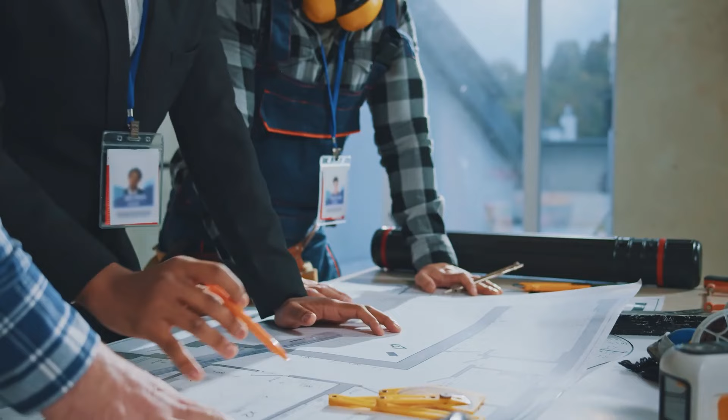American Copper Buildings, New York, USA. New York has more skyscrapers than Beijing, Seoul, and Toronto combined. Only Shenzhen and Hong Kong surpass it, leaving Manhattan packed so tightly with towers that new projects often demand highly inventive solutions. Over the years, we've seen pencil-thin supertalls, towers stacked on top of existing buildings, and even skyscrapers balanced on stilts. But nothing quite prepared the city for what rose on the banks of the East River.

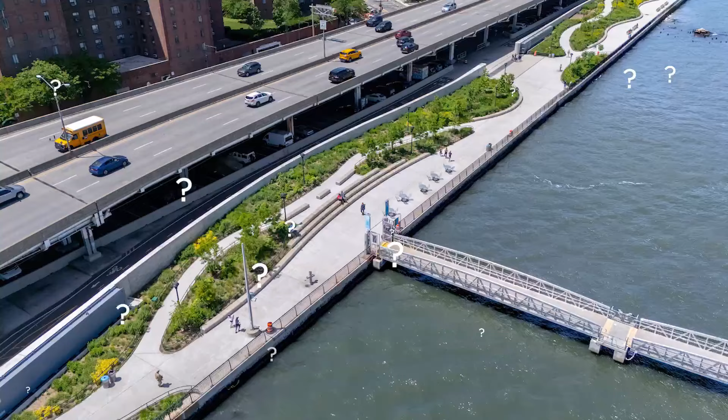The site itself was a puzzle. A protected park sat on one side, a planned schoolyard on the other, and just two narrow footprints remained available for development. Building two towers separately would waste potential, but combining them seemed impossible. The architects came up with a daring solution: lean the towers toward one another and connect them in the middle with a bridge. This idea became the American Copper Building, two slanted skyscrapers joined by a three-story sky bridge that instantly became one of the most distinctive silhouettes in the city.

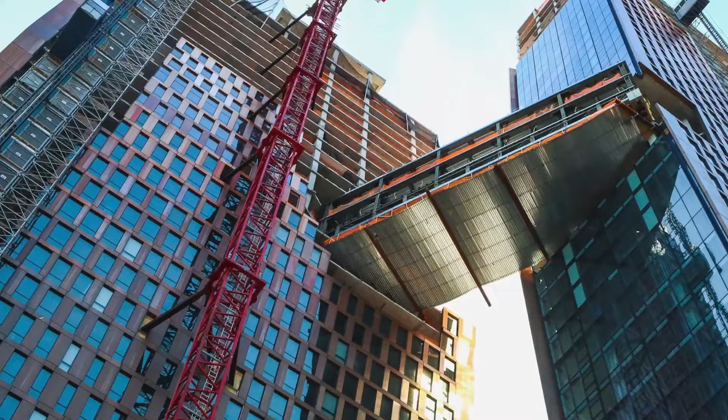The bridge itself was a challenge unlike anything New York had ever seen. Instead of fixing it rigidly, engineers had to let it move. It was anchored firmly to one tower, but allowed to glide on massive Teflon plates on the other. That way, when the wind makes the skyscrapers sway, each tower can shift independently without ripping the bridge apart.

Inside, the bridge was more than just a connector. It became a centerpiece, housing lounges, a gym, and even a swimming pool 300 feet in the air where residents could literally swim from one building to the other.

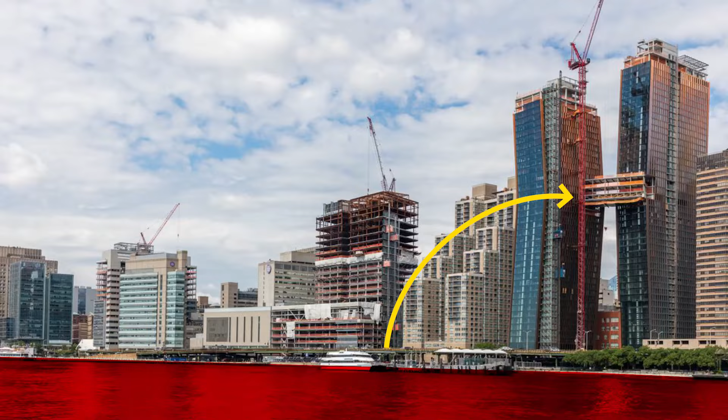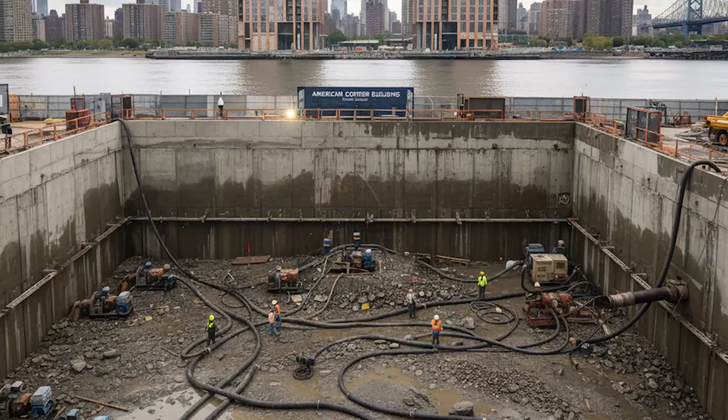But the problems didn't stop there. The construction site sat barely a meter above the East River, and the water table threatened to flood it before anything could rise. To solve this, crews dug the foundations inside a watertight concrete bathtub. Pumps worked around the clock for over a year, removing nearly 1.5 million gallons of water every single day just to keep the ground dry enough to build. Only after that could steel and concrete climb skyward.

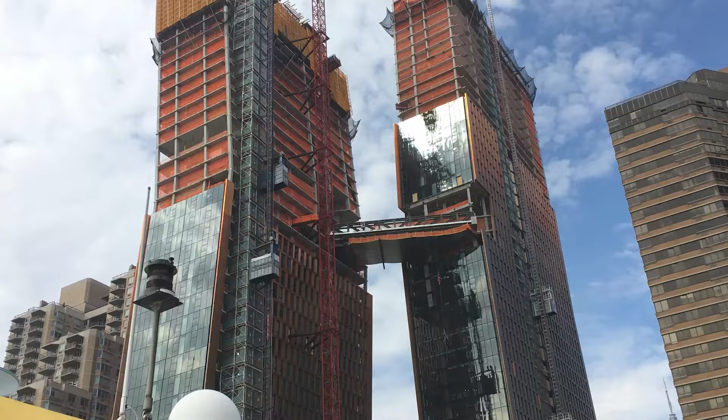Then came the structural drama. Because the towers were designed to lean inward, their appearance fooled people into thinking they were collapsing. Passers-by reported them as unsafe, and even the fire department demanded to see the blueprints to make sure the project wasn't a disaster in the making. To calm fears, engineers had to explain how the tilt was intentional and carefully balanced.

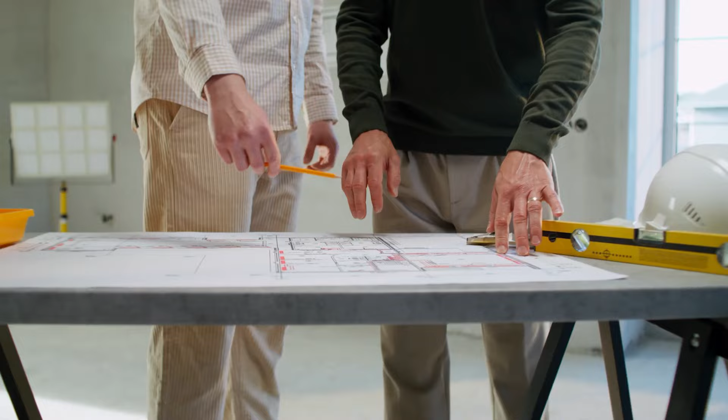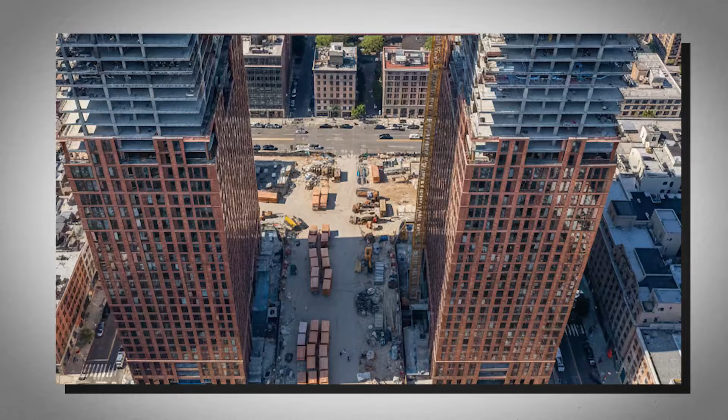Finally, there was the choice of skin. Covering the entire facade with over 4 million pounds of copper was a gamble. No other skyscraper in the city had ever been fully clad in the metal. At first, the orange glow of raw copper made the towers stand out like burning embers on the skyline. Over time, it will slowly darken, then eventually turn into a green patina like the Statue of Liberty, giving the building a living, evolving character that no other high-rise in Manhattan can claim.

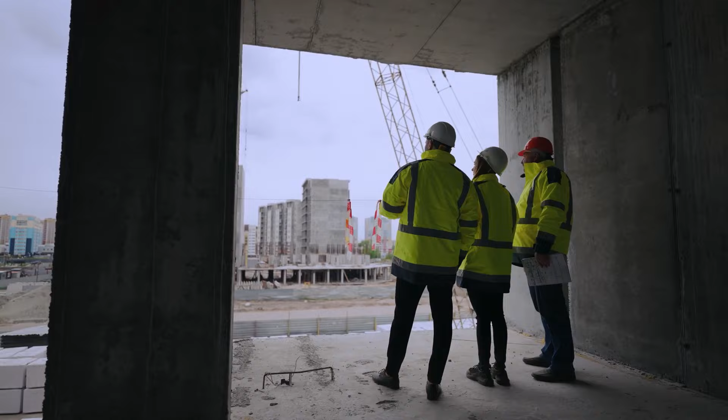Through all of these hurdles, the tight site, the flooding risk, the moving sky bridge, the alarming tilt, and the bold copper facade, the American Copper Building emerged as both a piece of engineering genius and architectural art. It revived the concept of the sky bridge in New York for the first time in nearly 80 years and proved that even in one of the most crowded, expensive, and complicated cities on Earth, daring ideas can still rise above the skyline. Marina Bay Sands, Singapore's sky-high surfboard.

Singapore's Marina Bay Sands isn't just a hotel, it's one of the most ambitious architectural experiments ever built. Three massive towers rise from the reclaimed land of Marina Bay, and across their tops sits something that looks almost impossible. A giant surfboard-shaped sky park stretching longer than the Eiffel Tower is tall.

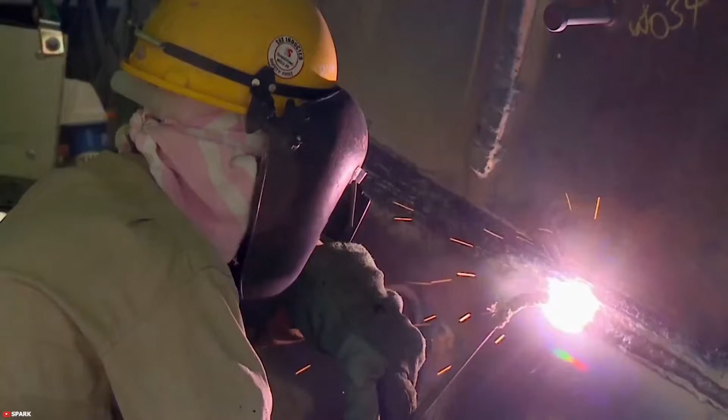Perched 650 feet in the air, it holds restaurants, gardens, observation decks, and the world's highest infinity pool, a pool so iconic that it seems to spill directly into the city skyline. But bringing this vision to life was a constant battle with physics.

The land itself was a challenge, built on reclaimed soil that was soft, unstable, and prone to settling. To anchor the skyscrapers, engineers had to drive more than 5,000 deep foundation piles into the ground, creating an underground forest of supports just to keep the towers steady.

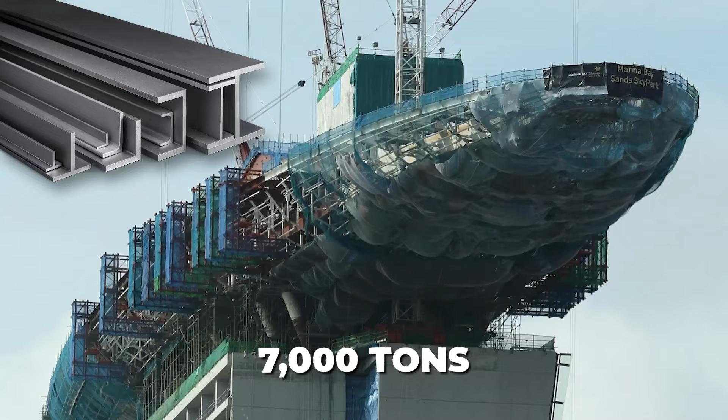Then came the biggest question: how do you balance a sky park the size of an aircraft carrier across 3 towers? The answer required both audacity and precision. The sky park was constructed in giant steel segments, some weighing over 7,000 tons, and then hoisted into place by one of the heaviest lifts in construction history.

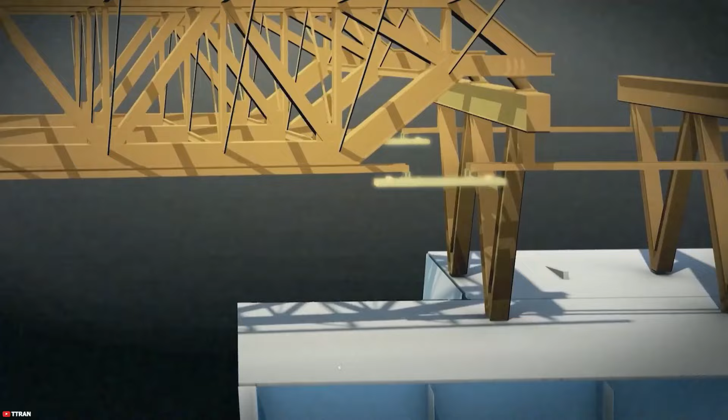One end cantilevers 66 meters beyond the edge of the tower with no support underneath, the longest public cantilever on Earth. To make it work, engineers had to install a system of expansion joints and flexible bearings so the park could shift with wind, temperature changes, and even small movements of the towers themselves.

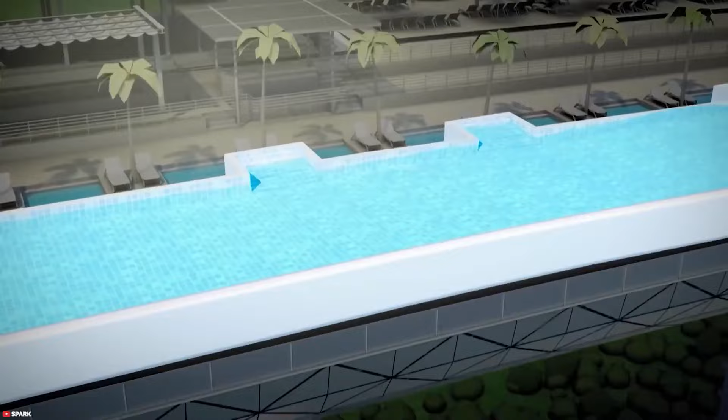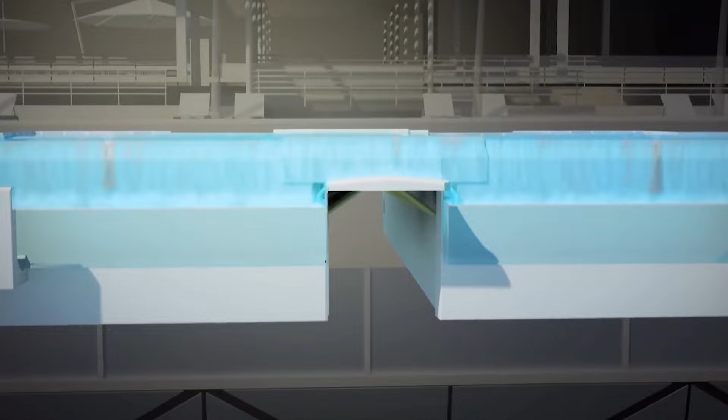The pool itself created another nightmare. At 150 meters long, it stretches across all 3 towers. But because the towers naturally sway in the wind, the water at the edges would slosh violently if left unchecked. To prevent disaster, the pool was built in 3 separate sections, with hidden expansion joints and surge tanks that absorb water movement. That way, guests can float calmly at the edge of infinity while the skyscrapers subtly shift beneath them.

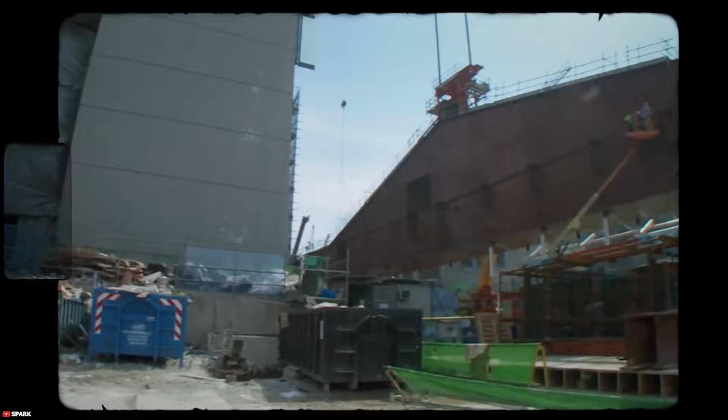Even during construction, dangers loomed. Hoisting the sky park's steel sections required flawless coordination. One misalignment and the entire structure could twist or crack. Workers labored hundreds of feet in the air, bolting and welding steel while cranes delicately nudged the massive pieces into place. Delays, budget overruns, and the sheer complexity of the project made many wonder if it would ever succeed.

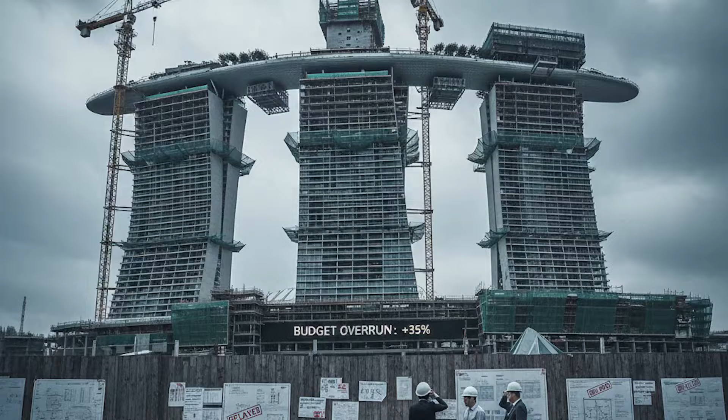Yet against all odds, Marina Bay Sands opened in 2010 as one of the most striking man-made landmarks in Asia. Its 3 leaning towers and gravity-defying surfboard redefined what a skyscraper could be, transforming Singapore's skyline into something instantly recognizable around the world. What was once dismissed as impossible has become a symbol of engineering genius, where tourists now sip cocktails and swim above the clouds.

Turning Torso, Sweden's twisting revolution. On the waterfront of Malmö, Sweden, rises a skyscraper that seems to defy gravity and geometry alike. The Turning Torso was the world's first twisting skyscraper, rotating a full 90 degrees from its base to the crown. Completed in 2005, it immediately became a symbol of modern architecture, but its daring form posed engineering challenges unlike any before.

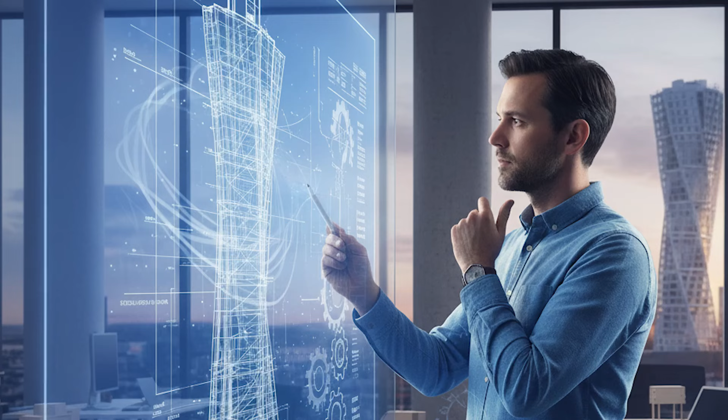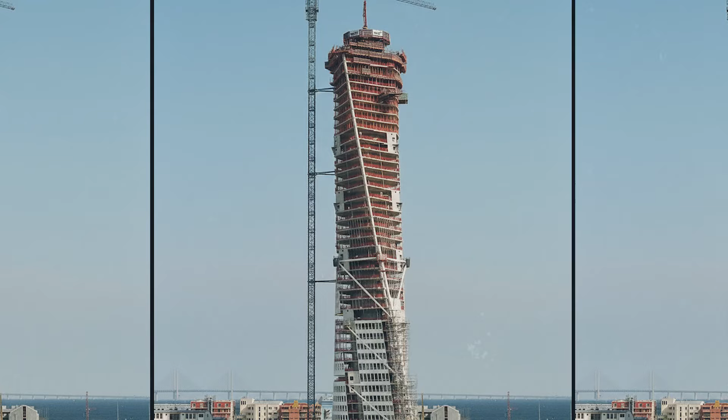Designed by Spanish architect Santiago Calatrava and inspired by a human body in motion, the tower had to translate an organic sculpture into a functional, livable building. Divided into 9 stacked segments, each containing 5 floors, the Turning Torso twists gradually as it rises, creating a dramatic corkscrew effect. But twisting a tower introduces uneven loads and torque that could easily destabilize a conventional structure.

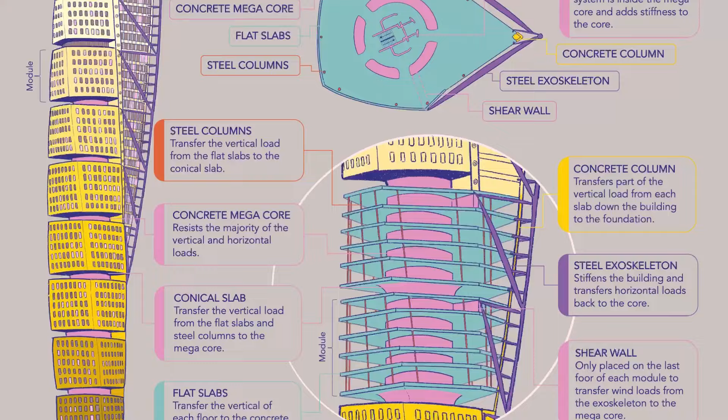To solve this, engineers anchored the building around a massive reinforced concrete core, while an external steel framework acts like a spine, distributing the twisting forces safely to the ground. Every floor plate and facade panel had to be custom-shaped and positioned with millimeter precision. Prefabricated concrete slabs were cast off-site and rotated into place one by one to maintain the spiral alignment.

At 190 meters tall, the Turning Torso became Scandinavia's tallest building and the first skyscraper to prove that twisting architecture could work. Its bold design inspired a generation of spiraling towers worldwide, from Dubai's Cayan Tower to Shanghai Tower. Here, on Sweden's southern coast, a radical idea became reality, a building that doesn't just reach for the sky, but twists toward it.

Bosco Verticale, Milan's vertical forest. In the heart of Milan, 2 residential towers rise above the city, but instead of glass and steel dominating their facades, they're covered in something completely unexpected: trees. Known as the Bosco Verticale, or vertical forest, these twin towers host over 900 trees, 5,000 shrubs, and 20,000 smaller plants, transforming the skyline into a living ecosystem.

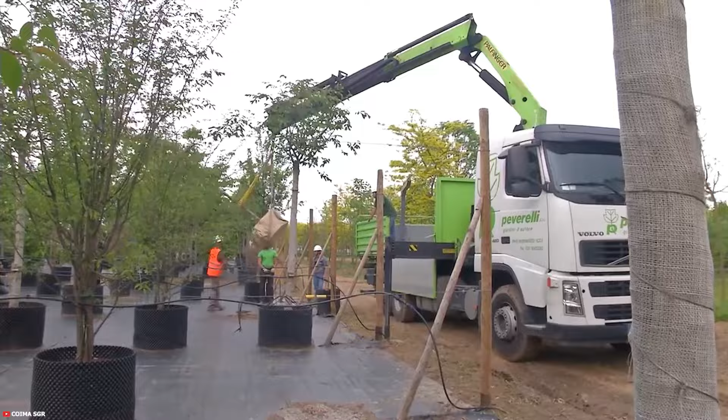The project was conceived as a radical solution to one of modern cities' biggest challenges: pollution. Each tower functions like a giant air filter. The vegetation absorbs carbon dioxide, produces oxygen, and helps reduce fine dust particles, improving air quality and cooling the surrounding environment. But turning skyscrapers into forests posed enormous engineering hurdles. How do you place fully grown trees hundreds of feet in the air without them toppling in strong winds?

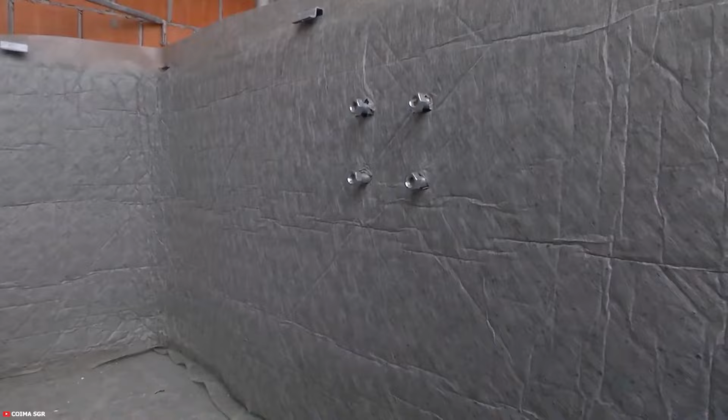Engineers designed massive reinforced balconies to support soil, root systems, and irrigation while carrying the weight of the residential tower. Each tree is anchored securely, and wind tunnel testing determined the maximum height and weight for the plants. An automated irrigation system recycles water and channels it through drip lines, keeping thousands of plants healthy year-round.

Maintenance required creativity too. Arborists rappel down the facades as flying gardeners to prune, replace, and monitor the vegetation.

Completed in 2014, the Bosco Verticale became a global symbol of sustainable architecture. The towers provide homes for people and habitats for birds and insects, restoring biodiversity and creating an ever-changing urban forest that proves skyscrapers can heal cities, not just crowd them.

432 Park Avenue, New York's slim giant. Rising high above Manhattan, 432 Park Avenue isn't just another skyscraper, it's the world's skinniest super-tall tower. At 426 meters tall and only 28 meters wide per side, its extreme slenderness makes it an architectural marvel, but also a structural challenge unlike any other.

Residents have reported hearing eerie creaks and groans as the building sways slightly during storms, a reminder that constructing a pencil tower in the heart of New York is no small feat. The site presented typical Manhattan challenges: a crowded urban environment, tight zoning rules, and sky-high land costs.

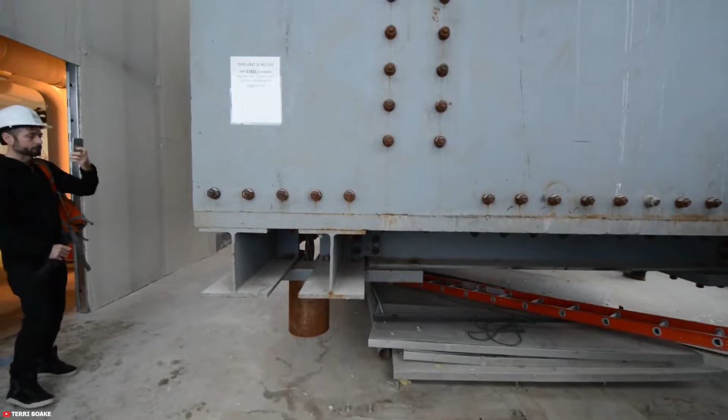Yet the main obstacle was the building's proportions. Slim supertalls are prone to swaying, and at this height, even minor movements can be noticeable. To stabilize the tower, engineers installed a tuned mass damper, a massive 400-ton steel pendulum near the top that absorbs vibrations, counteracting wind-induced sway and keeping motion comfortable for residents.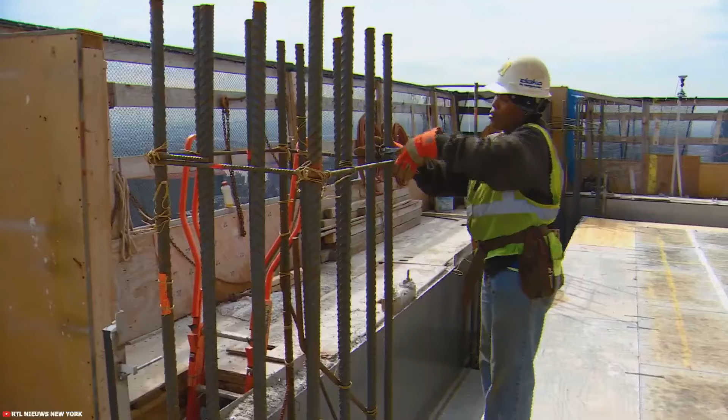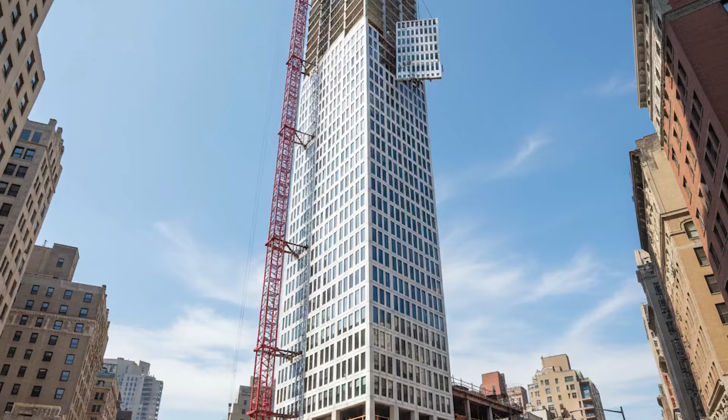Construction demanded extreme precision. The concrete core running through the center had to be cast with millimeter accuracy to prevent twisting or bending, and every floor plate was meticulously aligned to safely support the tower's weight while resisting lateral forces. Prefabricated concrete panels on the facade also required exact placement to ensure both aesthetic perfection and structural integrity.

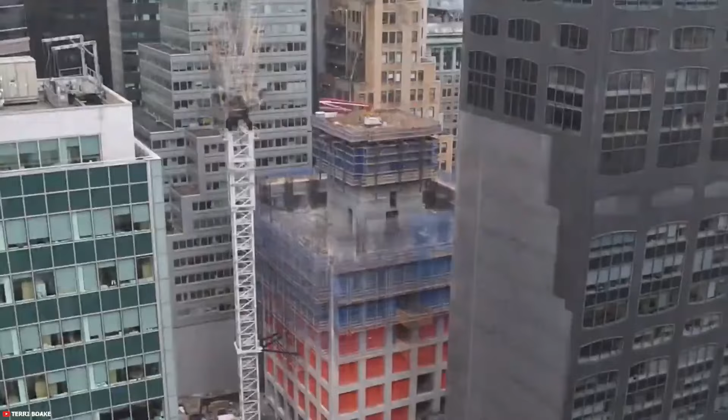Completed in 2015, 432 Park Avenue redefined what's possible in urban high-rise design. Its slender profile, engineering ingenuity, and luxurious interiors turn structural risk into a bold aesthetic, proving that sometimes vertical ambition comes in the thinnest of packages. And Manhattan's skyline has never looked quite the same.

Sky Habitat. In Singapore's Bishan district, Sky Habitat rises as a unique vision of urban living. Designed by Moshe Safdie, the same architect behind Marina Bay Sands, this residential complex consists of twin towers connected by multiple aerial walkways that create a vertical neighborhood in the sky.

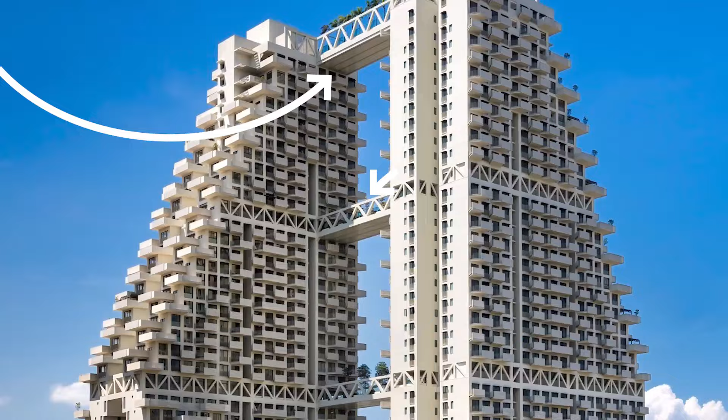Completed in 2015, the project combines stunning architecture with innovative solutions for density, greenery, and community living. The design features sky bridges and sky gardens that link the towers at several levels, offering residents shared spaces with panoramic views of the city and surrounding landscapes.

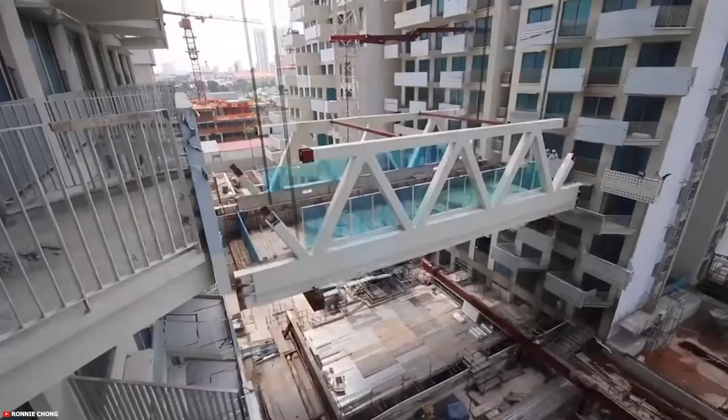But connecting towers high above the ground introduced significant engineering challenges. Each walkway had to account for the natural sway of the towers, which move independently during high winds and storms. Engineers developed flexible connections and reinforced structures that allow slight movement without compromising safety or stability.

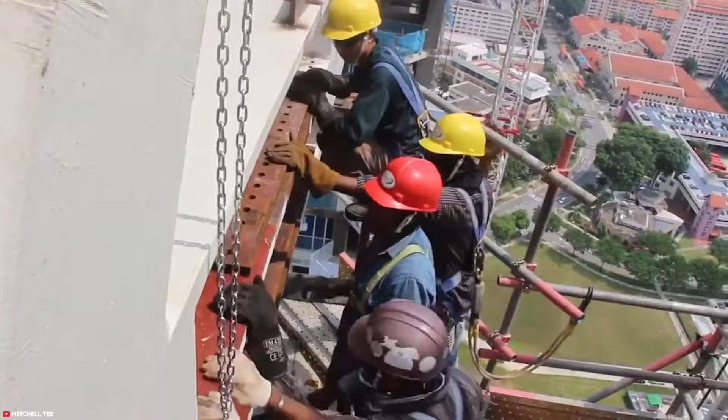The gardens themselves required careful planning. Heavy soil, large planters, and mature trees added substantial weight to the walkways, so structural supports were designed to accommodate both static and dynamic loads. Irrigation and drainage systems were integrated seamlessly to maintain the greenery year-round, turning the sky bridges into functional living spaces.

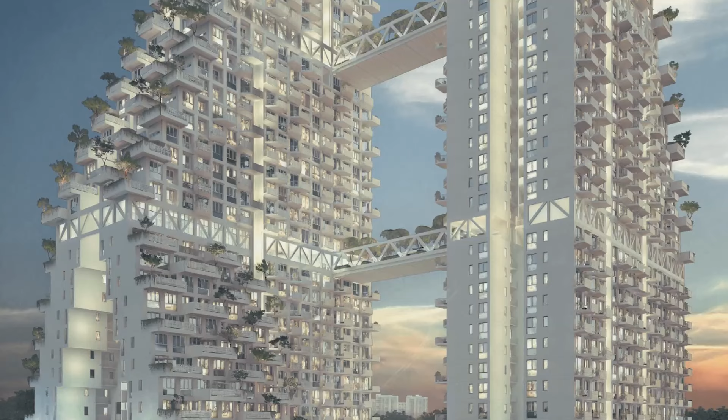Sky Habitat redefines high-rise residential design, offering both privacy and community in a densely populated city. By combining lush gardens, sky bridges, and innovative engineering, it demonstrates how skyscrapers can become vertical neighborhoods, places where residents live, interact, and connect above the city streets, bringing nature and urban life together in a harmonious, elevated environment.

Cayan Tower, Dubai's spiraling skyscraper. On the waterfront of Dubai Marina, Cayan Tower spirals 90 degrees from base to top, making it one of the world's most visually striking residential towers. Completed in 2013, this 75-story skyscraper isn't just an aesthetic marvel.

Its twisting design introduced a series of engineering challenges that pushed conventional high-rise construction to its limits. The concept was simple in theory, but fiendishly complex in practice.

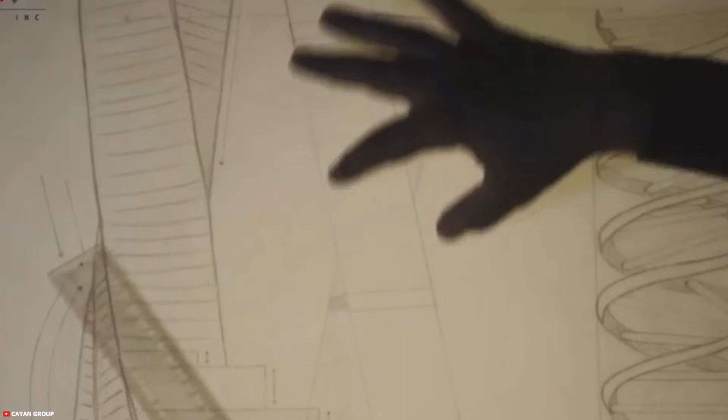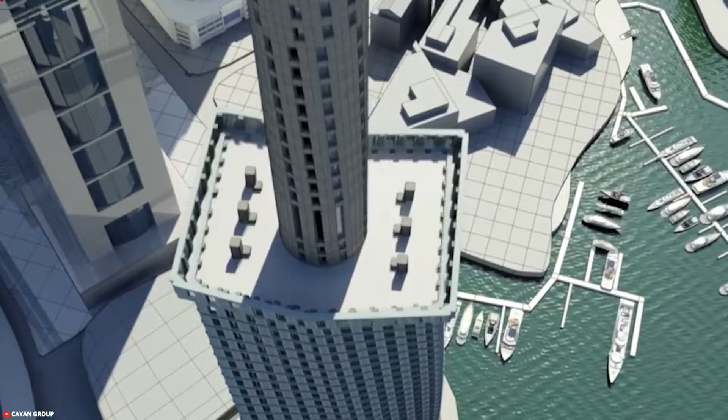Each floor rotates slightly relative to the one below, creating a full 90-degree twist over the building's height. This spiral generates uneven loads and torque on the structure, which engineers had to carefully calculate and reinforce. A central concrete core absorbs lateral forces, anchoring the tower securely while maintaining stability and preventing twisting forces from compromising the building. Construction required extraordinary precision.

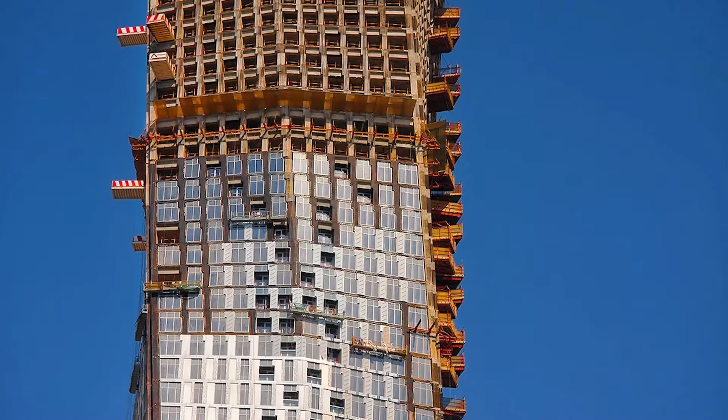Each floor plate is uniquely shaped, and steel supports were custom fabricated to match the spiral geometry. Wind engineering was critical. Dubai's coastal gusts demanded detailed modeling to prevent excessive sway or vibrations. Even interior layouts posed challenges. Apartments, plumbing, elevators, and utilities had to accommodate the rotation while remaining functional and safe.

When it opened, the Cayan Tower became an instant icon of Dubai's skyline. Its graceful twist isn't just a striking visual, it represents a triumph of engineering over extreme geometric complexity. Rising safely into the clouds while offering luxurious living spaces, the tower stands as a testament to architectural audacity and innovation, proving that even a spiraling skyscraper can achieve both beauty and practicality.

King Power Mahanakhon. Dominating Bangkok's skyline, the King Power Mahanakhon stands out like a digital sculpture in a sea of conventional skyscrapers. Completed in 2016, this 314-meter-tall tower features a striking pixelated facade with irregular cuboid sections seemingly carved out of the building, giving it a glitching effect that's unlike anything else in the city.

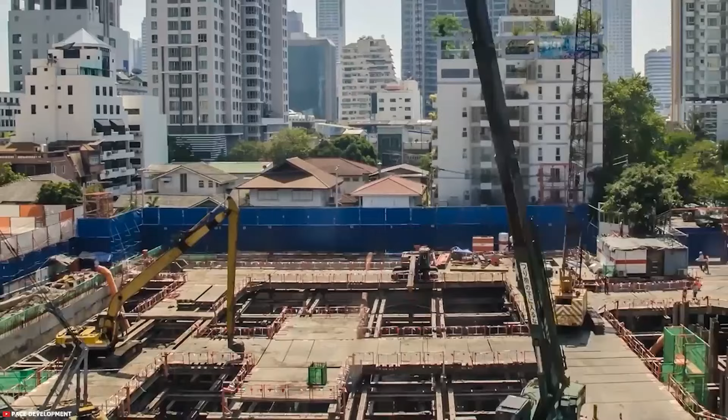While visually dramatic, this pixelation created one of the most complex structural challenges in modern high-rise construction. The tower isn't a simple straight column. It's composed of two distinct volumes, a smooth outer skin and an inner core, interrupted by voids that twist and break the facade at irregular intervals.

Each pixel had to be carefully engineered to avoid compromising the structural integrity of the building. Engineers employed a reinforced concrete core for stability, while the outer skin was supported by a steel exoskeleton that transfers loads safely around the missing sections.

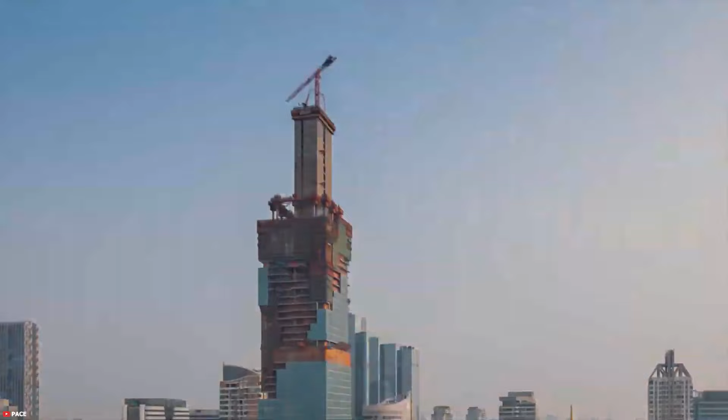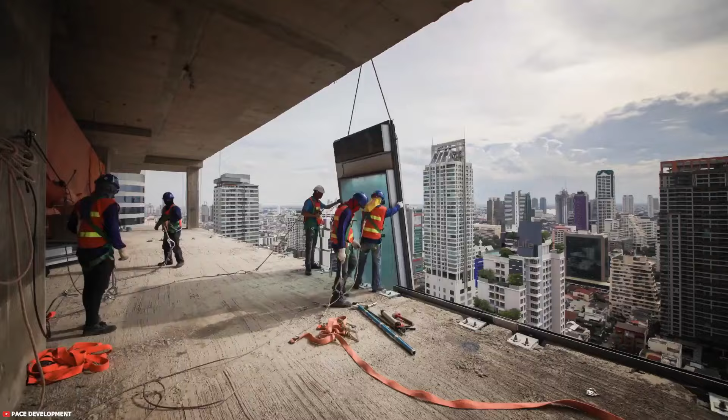Construction was equally demanding. Every floor plate in the pixelated areas had unique shapes, requiring precise prefabrication and alignment. Cranes and hoists had to navigate around the voids, and each irregular section was carefully monitored to ensure it connected perfectly with the core. Wind engineering was critical as well.

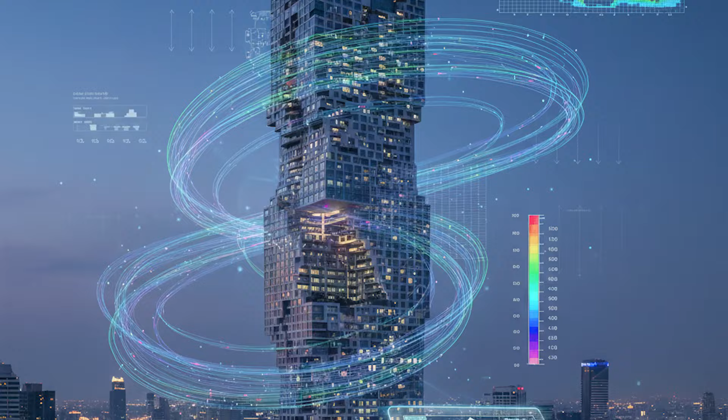The perforated design created unusual air currents that could cause swaying, so computational fluid dynamics simulations were used to predict and counteract potential motion. The pixelation wasn't just for looks, it allowed for outdoor terraces and observation decks, giving residents and visitors breathtaking views of Bangkok.

The tower also includes luxury residences, a hotel, and retail spaces, all integrated into the unconventional geometry. The visual effect makes the building look like it's dissolving or unraveling as it rises, an optical trick that's become a signature landmark of the city.

King Power Mahanakhon exemplifies how bold architectural concepts can meet engineering ingenuity. By turning a facade into a dynamic pixelated sculpture, the architects and engineers transformed Bangkok's skyline, proving that skyscrapers can be both functional and visually revolutionary.

Raffles City. Rising dramatically over the Yangtze River, Raffles City Chongqing is a skyscraper complex unlike any other. Completed in 2019, it consists of 8 towers, but the showstopper is a 300-meter-long horizontal structure, nicknamed the Horizontal Skyscraper, that spans across the tops of 4 of the towers.

The effect is jaw-dropping. It looks like a massive bridge suspended in the sky, defying conventional notions of what a high-rise can be. The engineering challenges were enormous.

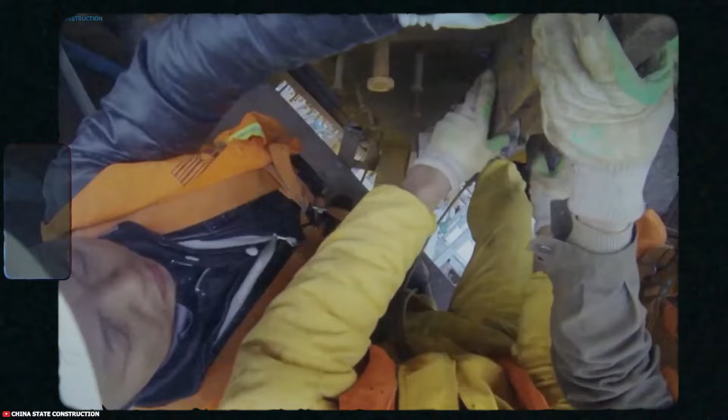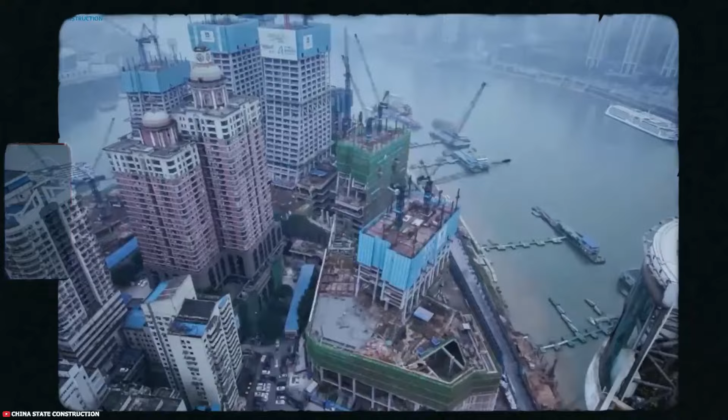The horizontal structure weighs tens of thousands of tons and is supported only by the vertical towers at either end. Any differential movement between the towers caused by wind, thermal expansion, or even seismic activity could stress the structure to catastrophic levels. Engineers had to carefully calibrate the core and foundation of each tower, ensuring that the horizontal skyscraper could float above them without transferring dangerous loads.

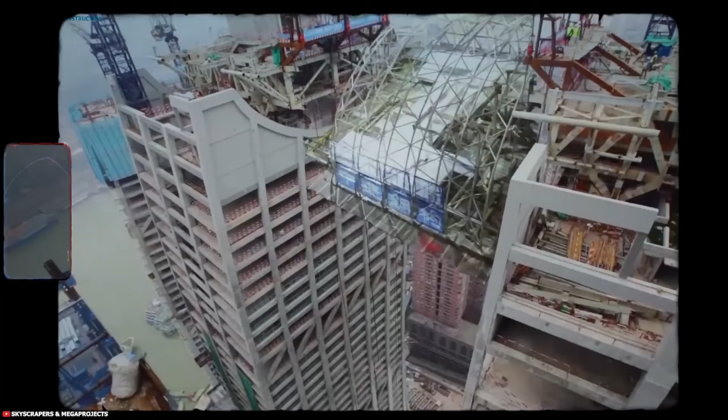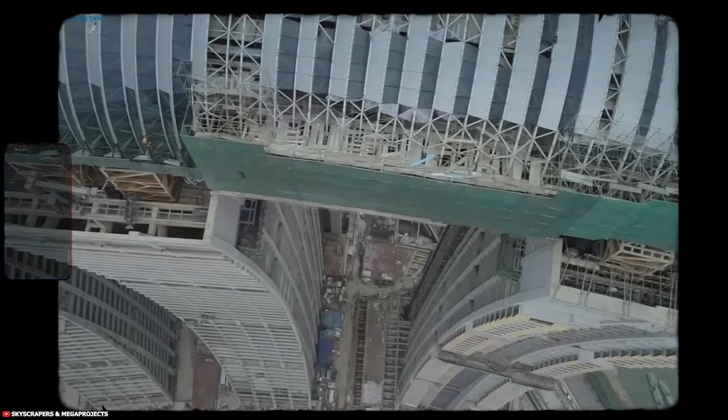Construction of the skybridge required innovative prefabrication and lifting techniques. Sections of the horizontal structure were assembled on temporary supports and gradually raised into place, then connected to the towers with massive steel joints that allow for subtle movement while maintaining rigidity.

Wind tunnel testing and seismic modeling were essential to ensure the long span could withstand the forces of nature in this riverfront city. The horizontal skyscraper isn't just a visual spectacle. It houses sky gardens, restaurants, and observation decks, giving visitors panoramic views of the city and the river below. By connecting multiple towers at the top, it also distributes mechanical systems efficiently, allowing for shared amenities and infrastructure across the complex.

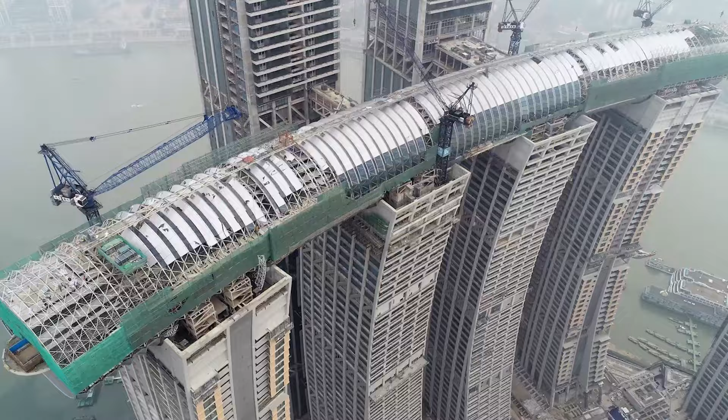Raffles City Chongqing pushes the boundaries of what's possible in vertical architecture. It transforms the idea of a skyscraper from a single vertical entity into a connected, dynamic complex, proving that sometimes the most audacious designs require equally audacious engineering. Today, it stands as a symbol of innovation, combining bold aesthetics with structural mastery on one of the world's most challenging urban sites.

Shanghai Tower. In the heart of Shanghai's financial district, the Shanghai Tower rises to 632 meters, making it the world's second tallest building. Its elegant spiraling design isn't just for show. The tower twists as it climbs to reduce wind loads, a critical innovation for a structure of this height. Beyond its record-breaking stature, it also houses the fastest elevators on Earth, zipping residents and workers up at breathtaking speeds.

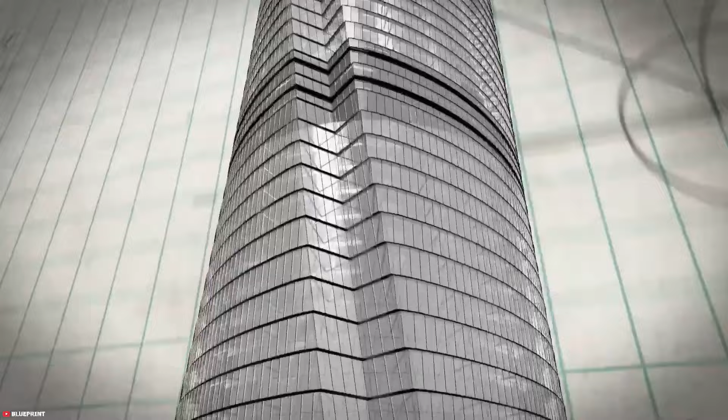Wind was the primary challenge. At such extreme heights, gusts can create enormous lateral forces that threaten stability. To counter this, architects and engineers designed the tower with a 120-degree twist along its vertical axis. The spiraling facade directs wind around the building rather than against it, reducing pressure by about 24% and lessening sway for occupants. Another hurdle was vertical transportation.

Moving people efficiently across 128 floors demanded record-breaking elevator technology. The Shanghai Tower features double-deck elevators capable of reaching speeds over 20 meters per second, carrying hundreds of passengers simultaneously while ensuring safety and comfort. Engineers incorporated advanced damping systems and air pressure controls to minimize ear discomfort and vibrations.

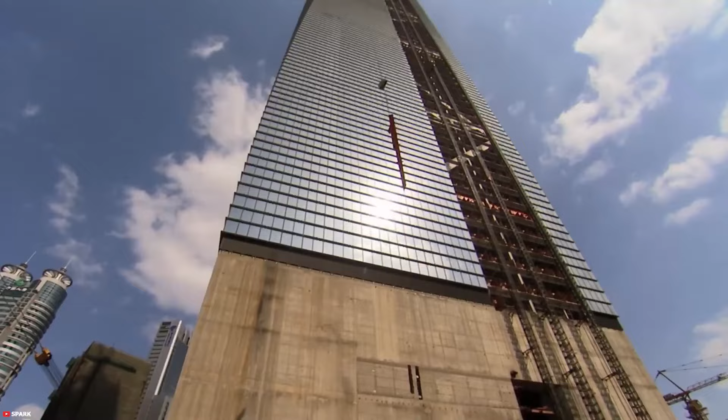The building's design also prioritizes sustainability. A double-skin facade provides insulation, reducing energy consumption, while wind turbines and a rainwater collection system make it one of the most energy-efficient supertalls in the world. Inside, the tower blends office space, hotels, observation decks, and retail into a vertical city that functions smoothly despite its immense scale. The Shanghai Tower represents the pinnacle of modern skyscraper engineering, a fusion of architectural beauty, cutting-edge technology, and practical innovation. Its twisting form not only defines Shanghai's skyline, but also sets a benchmark for how extreme height, safety, and sustainability can coexist in a single, awe-inspiring structure.

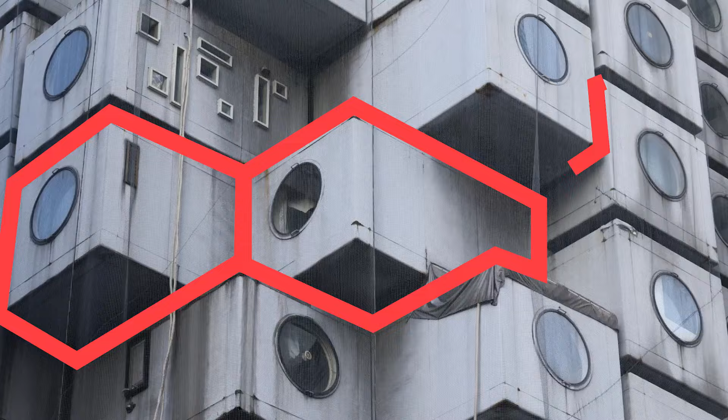Nakagin Capsule Tower. In Tokyo's bustling Shimbashi district, the Nakagin Capsule Tower once stood as one of the strangest experiments in skyscraper design. Completed in 1972 and sadly demolished in 2022, the 14-story tower was a modular marvel. Each floor contained small, removable capsules that could be individually replaced or updated, creating a living, adaptable structure unlike anything else in the world. The concept was revolutionary.

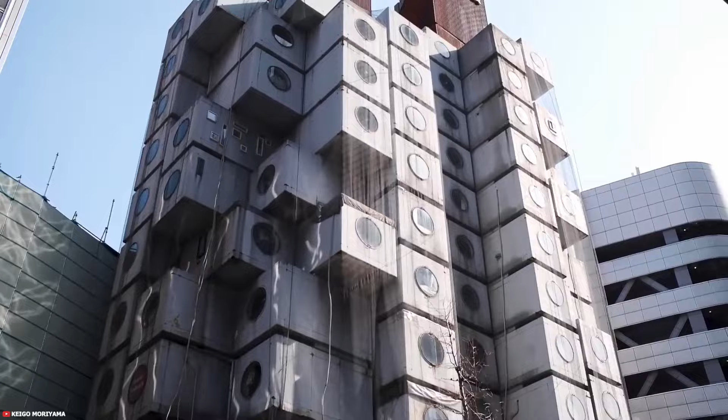Architect Kisho Kurokawa envisioned a tower that could respond to the rapid pace of urban life, where residents could literally swap out living units as needs changed. But implementing this idea came with extreme technical challenges. Each capsule had to be self-contained, including plumbing, electrical connections, and structural supports, while also being light enough to be lifted and attached to the central core.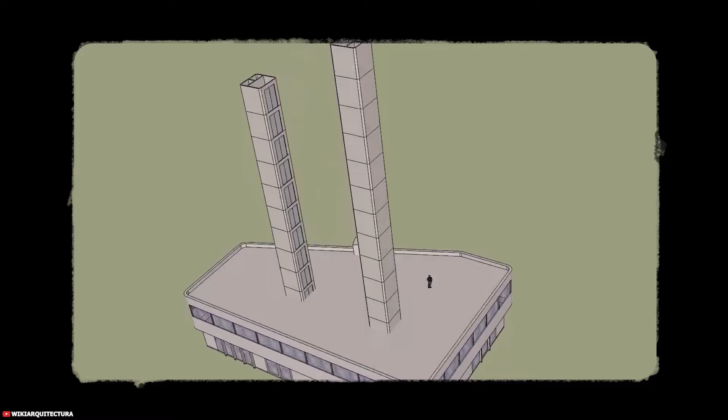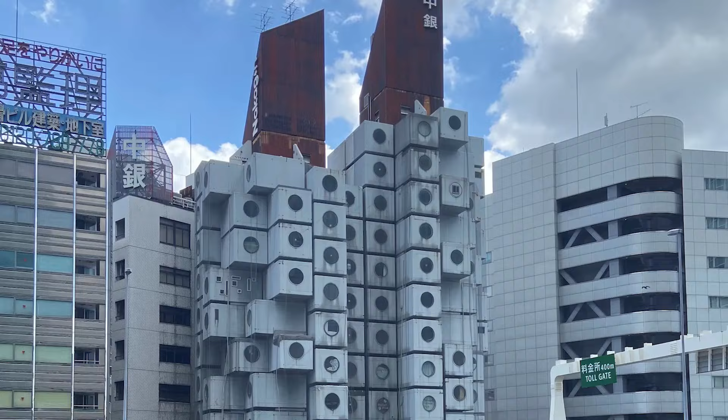The tower's construction was equally unique. A central reinforced concrete core provided stability, while the capsules were prefabricated off-site and bolted onto the core with massive steel connectors. Precision was crucial. Even a small misalignment could compromise the entire floor.

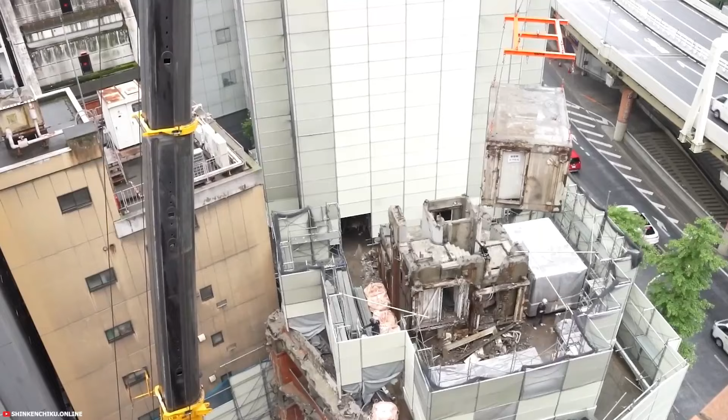Maintenance was another hurdle. Over time, the connections and utilities degraded, and many capsules became uninhabitable, contributing to the tower's eventual demolition. Despite its practical challenges, the Nakagin Capsule Tower remains an icon of metabolism, an architectural movement that sought to create dynamic, flexible structures for rapidly growing cities. Its striking modular design influenced architects worldwide and remains a symbol of daring experimentation in urban housing.

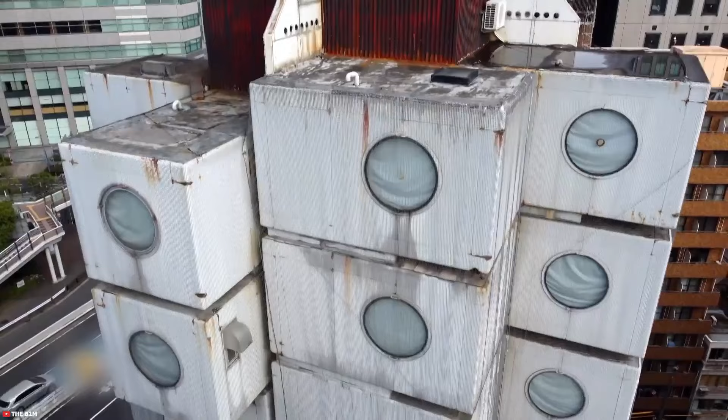The tower may no longer exist, but its legacy endures as a reminder that skyscrapers can be more than static monuments. They can be living, evolving systems designed to adapt to human needs.